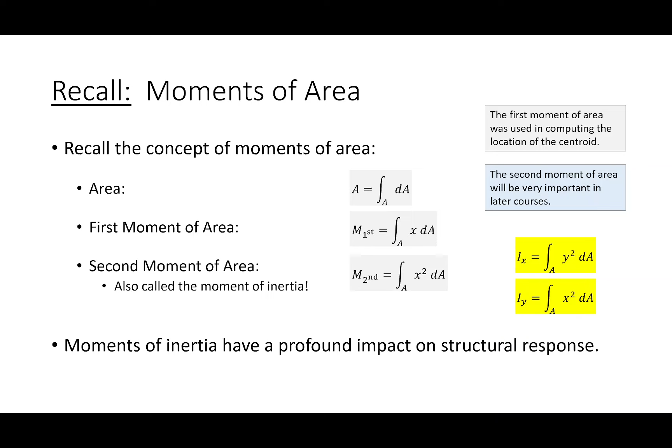So just a little background. We've talked about area and then moments of area. If we wanted to calculate area, we would integrate dA. If we wanted to calculate the 7th moment of area, it would be the integral of x to the 7th times dA. In engineering, the first and second moments of area are the only ones that are really useful. The first moment of area is critical to locating the centroid, and the second moment of area is called the moment of inertia.

We talked a little bit about how they have a profound impact on structural response. Here's my little surface pen—you can see it's got a rectangular cross section. It's stiffer this way than if I were to bend it this way. Imagine if any of you have a ruler in your hand: it's flimsy one way, really wavy and flimsy, but if you take it 90 degrees and try to bend it about the sharp side, it would be very rigid, very hard to do that. That's because it has a higher moment of inertia about this axis.

Now what we typically are interested in when calculating a moment of inertia is: if we have a given cross section, what we're interested in is a moment of inertia that references a particular coordinate system. So we want the moment of inertia about this origin. And where do you think that point is? The centroid. That's what we're interested in.

So let's deal with a really simple shape. Let's say I had a rectangle, and I wanted to find the moment of inertia about, let's say, the x-axis. So this is the x-axis, this is the y-axis. The moment of inertia about the x-axis would be the integral of y squared dA. So let's talk about that.

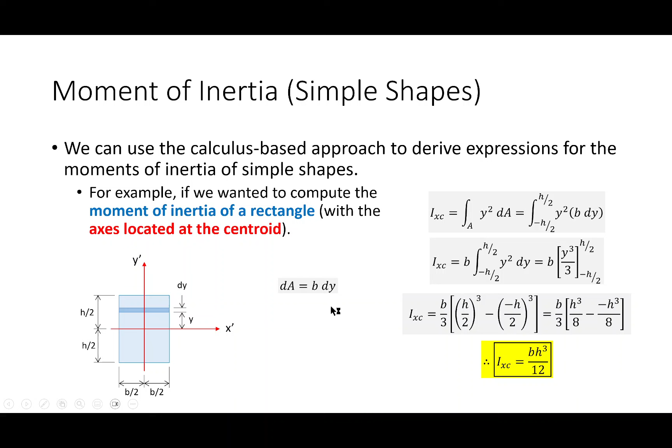Does that make sense? Okay, now what I'm interested in, by the way, is not how to compute the moment of inertia of a rectangle. I'm interested in how to compute the moment of inertia of something like this, right? Something that is much more arbitrary and much more complicated.

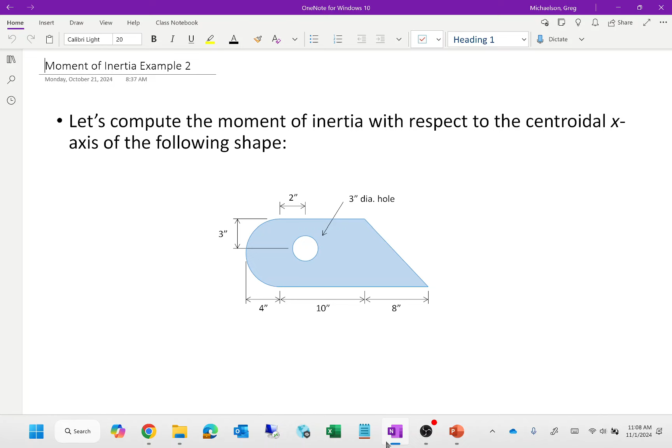And the point I'm making is, if I wanted to compute the centroid of something like this, how would I do it? I would break it up into simple shapes, right? To determine properties of each one of those shapes, and then there's an algorithm, right? I propose that the same thing is true for the moment of inertia, okay? So we're going to do the same thing.

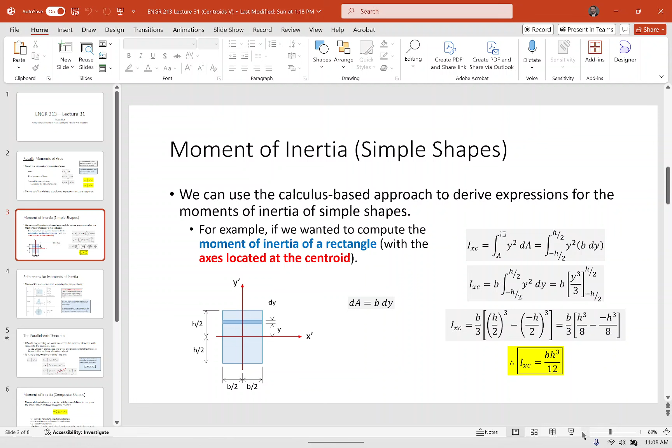So I have here the moment of inertia of a rectangle. If you open up your textbook it will list moments of inertia of various simple shapes. And I've put some of those here on the board because I noticed that the textbook is either really heavy or really digital, and you may or may not have it with you, so I figured let's just go ahead and have it here for reference. But every one of these are within your textbook that you can very easily find.

One of the things I'll mention is you might want to pay attention to the notation. So, for example, let's take a look at the triangle. The triangle is kind of easy. So the triangle actually does do this. So look here, I've got a triangle that's B wide and H tall, okay?

Now, it lists two moments of inertia. It lists an IX and then this sort of IX bar, this IX prime. That's sort of the one that we're going to use because that's referencing the centroid. The other one references the bottom, which does have applications, but for the purposes of what we're doing here, we're just interested in the centroidal moments of inertia. So like for the rectangle, just use the one with the bar, so on and so forth. Okay, make sense?

And just so everybody is aware, we are not going to use it, but if you're wondering what they are: we have the moment of inertia about the x-axis, which is the integral of y squared dA. We have the moment of inertia about the y-axis, which is the integral of x squared dA, something like this. So what if you have the integral of xy dA? I think the textbook calls that J. It's a polar moment of inertia or a mixed product of inertia.

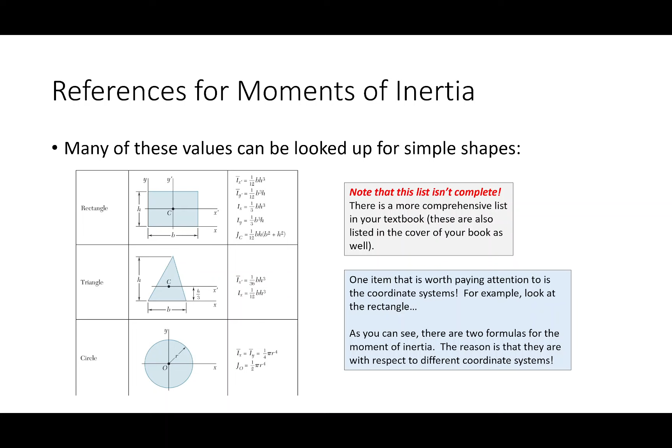So if you see these J terms, I think some textbooks refer to that differently, but I think that's what it's calling it here. Sometimes they just call it IXY, sometimes they call it J, but we're not using those. So, okay, so far so good?

Okay. Now, like I said, the analogy with centroids is: what we did with a centroid is we took a complex shape, broke it up into simple shapes, determined properties for each one of those shapes, plugged it into an algorithm, right? So the way a moment of inertia is going to work is the same idea. We're going to break it up into simple shapes, determine properties of each of those individual shapes, and then plug it into an algorithm, okay? The name of that algorithm is going to be the parallel axis theorem, okay? And I want to take some time and explain how this works, okay?

Like I said, we are interested in locating moments of inertia with respect to the centroid, okay? So let me sort of give you the motivation maybe here on the screen. I'll do the motivation here on the screen, okay? So let's come up with a simple shape.

Let's take a plate with a hole in it, okay? Where is the centroid of that hole? I don't know, like right there? Okay, where is the centroid of the whole plate? The plate with the hole in it? I don't know, maybe like right there? Does that sound about right?

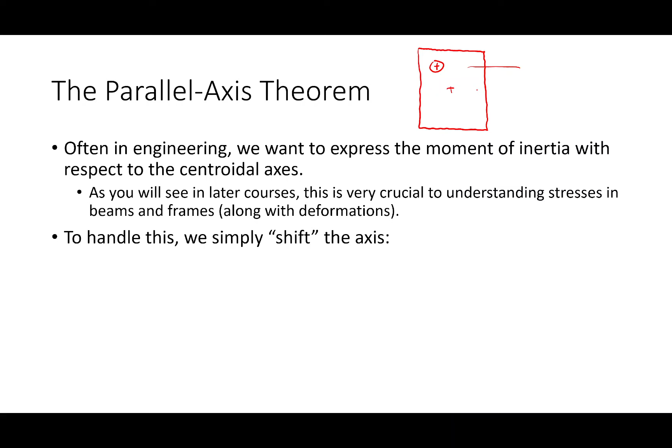Now the trick that we use is this. So if I have the moment of inertia as the integral of y squared dA, if I want to reference this with respect to a common axis, what I'm going to do is shift it. And the way I'm going to shift it is I'm going to say y plus some shift, and then the shift is going to be however far the distance is from here to here. That's my little shift that I do.

All right, so how does this work? Here's going to be my moment of inertia, and here's going to be my new moment of inertia. I'm going to shift it. Let's break out the algebra. What do I do with this? How do I expand this? Break out a little bit of that aluminum foil, right? And so we do first, outside, inside, last.

So then I got a bunch of terms. I'm going to take those terms, do what I can do with integrals. The integral of the sum is the sum of the integrals. Factor out my constants, maybe turn it into something like that. So I got 3 different integrals.

So I have the integral of y squared dA, that's my original moment of inertia. I've got this one over here. This integral over here is the integral of dA, which is just the area times d squared. So this is what I'll call A D squared. And then I've got this.

This references the centroid. But the whole point of this exercise was to determine the moment of inertia with respect to there. So what are the coordinates of the centroid if I place the axis right here? 0, 0, right? So what I'm saying is this whole integral goes to 0. Does that make sense?

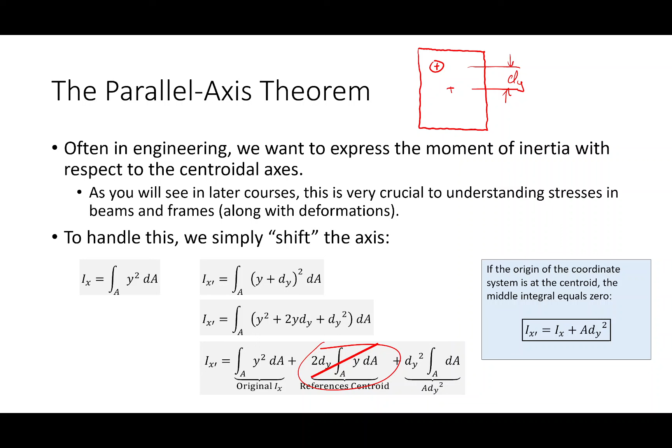So the algorithm for the moment of inertia is this. If I want to find the moment of inertia of a composite shape, what I do is I take the moment of inertia of each individual shape and I add A D squared. Area of each shape, and then D.

You would think that the tricky part is how to compute D, but that's actually really easy because all I do is take the distance for each individual shape minus the centroid for the whole thing. This is actually the easiest part. It seems challenging, but it's really easy.

And one of the other things that's kind of interesting is, does it really matter which direction I do the subtraction? Like, could I do y bar minus yi? Does it really matter? Why does it not matter? Because I'm squaring it. Whether I do this minus this or this minus this, I'm getting a number and then I'm squaring that number. It's going to come out positive. It's not going to matter.

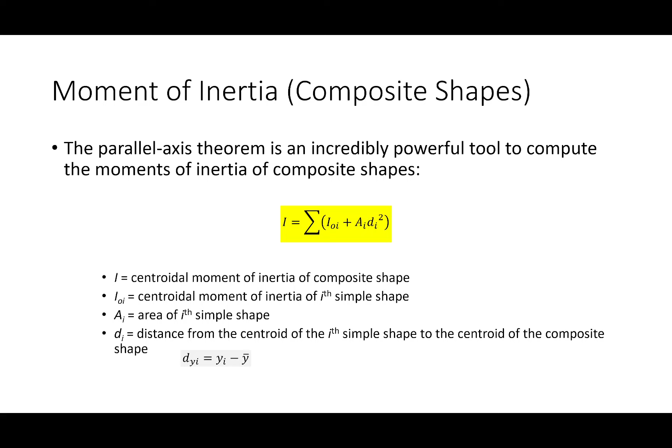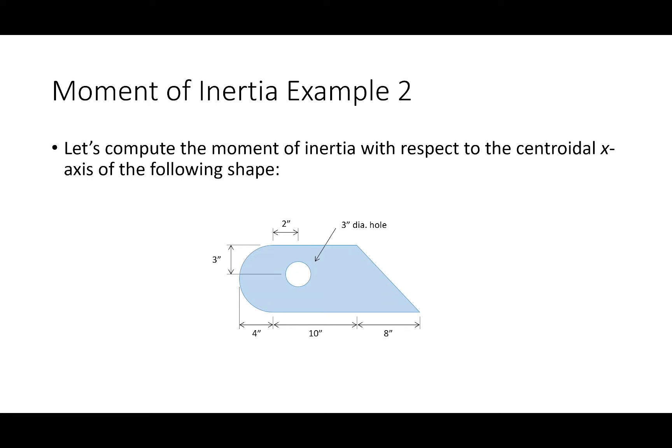So now I have an algorithm for computing the moment of inertia for an arbitrary shape by splitting it up into a series of simple shapes. So in order to exercise that, let's look at the following problem. I'll show you how this works. And by the way, this is another one of those methods that's very Excel friendly.

So we're going to compute the moment of inertia with respect to the centroidal x-axis of the following shape. So here's sort of, if you want a physical understanding of what we're doing here. Oh God, please forgive my horrible 3D art skills.

So let's say I had a beam that was made of this, that was extruded in 3 dimensions. And let's say that I decided to stand on top of this beam. What we are computing is a moment of inertia that would express how stiff it is this way. So the moment of inertia about the centroidal x-axis would tell me how stiff it is this way.

So if I wanted, what I could do is I could repeat, after we do this problem, I could literally repeat the entire exercise by taking this and turning it 90 degrees and doing it again. And it would tell me which is the stronger direction. And by the way, which do you think is the stronger direction? This way or turning it? See, I would argue the other way because I think it's longer this way.

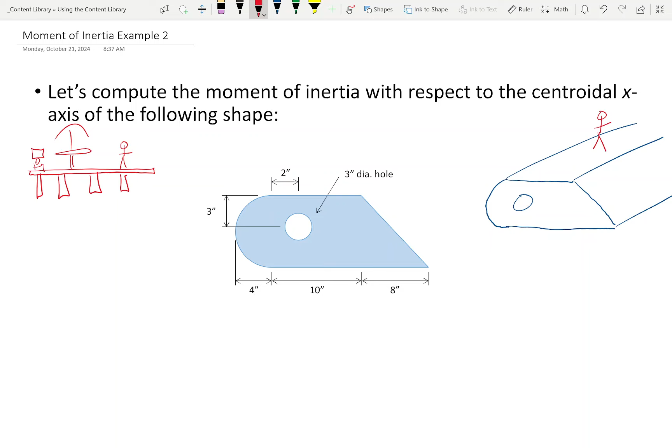Okay, so here's what I'm going to do. I'm going to split this up into what I think is a pretty easy to figure out series of simple shapes. And what we'll do is we'll number them.

So we'll call the rectangle, we'll deal with the rectangle first. We'll deal with the triangle second. We'll deal with the semicircle third. And the circular hole fourth.

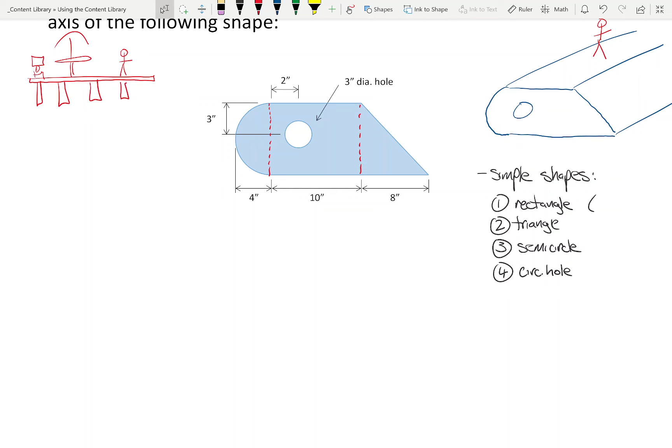And by the way, each one of these shapes is going to have positive contributions except the last one because it's a hole. Does that make sense? Everybody, so far so good?

Now, the goal is to compute the moment of inertia with respect to the shape's centroid, right? But in order to do that, we first need to figure out where the centroid is. We don't even know where the centroid is for this location. So we are going to need to pick a reference coordinate system right off the bat.

So what I'm going to do is this. I'm going to say that's my reference coordinate system, so that when I start computing things, I'll have something to go off of.

Okay, do we have enough information here to do this? We don't have the overall height or the radius of that semicircle or diameter. Well, did I not give that? Did I not copy? You gave the diameter. Oh yeah.

Let's talk about that actually. So this is 4, right? I'm glad you brought that up. That was actually my next note.

Did you get a sneak look at this before? Yeah, you're right, this dimension doesn't look like it was explicitly given. But let's look at the semicircle - if the radius of the semicircle is 4, what is the diameter of the semicircle? 8. And so that makes this height 8 inches.

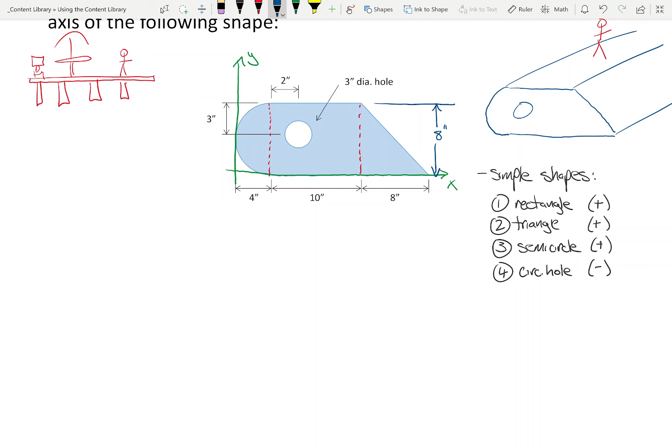Remember in Engineering 102 when I said only place a minimum number of dimensions necessary, because the more you place, it all comes full circle. All right, okay, so let's move on.

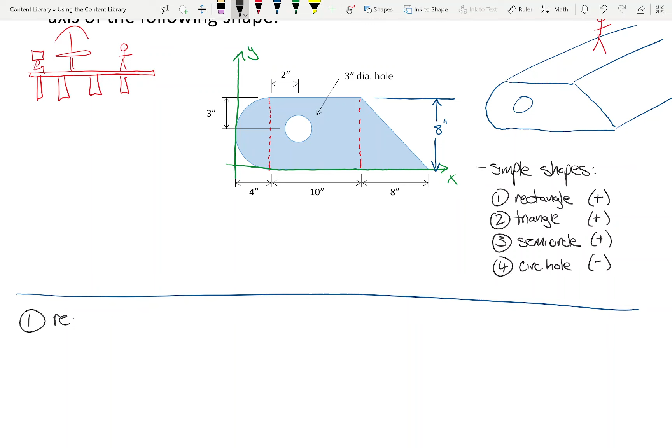Okay, let's start computing some properties. Let's start off with the rectangle. For the rectangle, the first thing - for this algorithm, for this computation of the moment of inertia, we're going to need 3 properties. And let me do some notation here - let me do A sub 1.

So we're going to need 3 properties. The first thing we're going to need is the area of the rectangle. What is the area of the rectangle? 80, right? Because it's 10 times 8, which is 80 square inches.

Okay, the next thing that we're going to need - if we're computing a moment of inertia with respect to the centroidal x-axis, we're going to need y distances. So let's do a y1. Y1 is going to be how far is it from the origin to the centroid of that rectangle vertically. So how far is that? Is it 3 or is it 4?

Because the rectangle is 8 inches tall, right? So we're talking about just the rectangle. To get to the center of the rectangle, we're going 4 up, right?

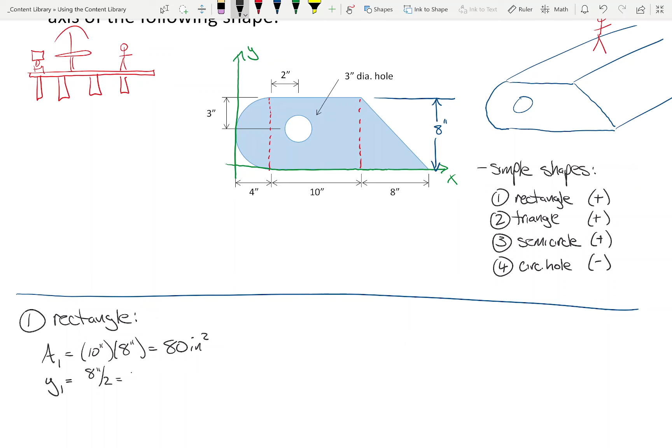Okay, now we are also going to need a moment of inertia with respect to the x-axis. Now, we derived that for a rectangle, and I have that listed up here. That is BH cubed over 12, where B is the horizontal distance and H is the vertical.

Okay, so this is our first time dealing with these formulas, and in these formulas, the order really matters. B is the horizontal, H is the vertical - the order really matters. Okay, so what are we getting for this? We'll say 2 decimal places.

Do I have a second? Because everybody brought their Casio FX115 ES Plus or similar scientific calculator on a Friday at 11 o'clock.

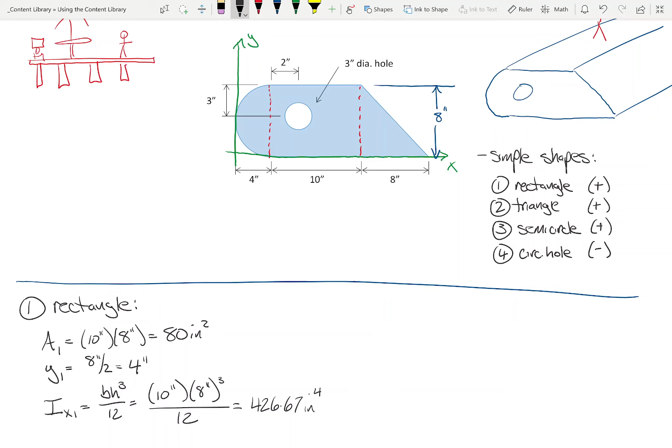Yes, okay, there we go. Is everybody good with that? Okay.

Let's look at this triangle. With the triangle, we're saying the width and the height. Let's see if we can figure a couple things out. First off, what is the area of the triangle going to be? What is the area of a triangle? 1/2 base times height.

8 over 2 is 4. 4 times 8 is 32.

Y sub 2—I didn't give you that one. Let's see if we can remember this. How far from the bottom, the green coordinate system, to the centroid of a triangle? Everybody's saying, I can see it, h over 3, right? We go a third up for a triangle. So 8 over 3, that's going to be like 2.67—a little more than 2, a little less than 3.

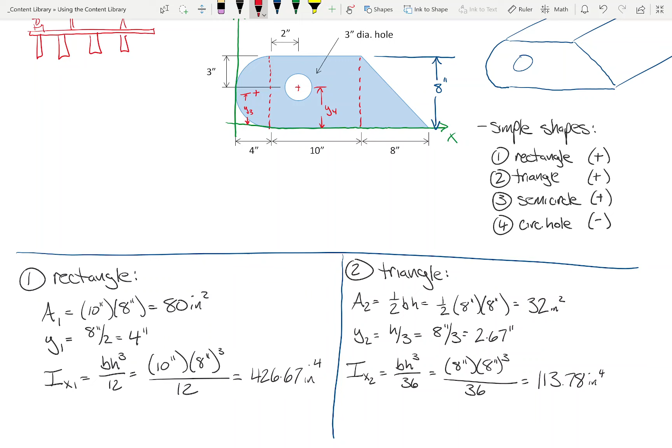Okay, so now that I've written that down, let's do 3 and 4. So 3 is the semicircle, and what I'll say for that is the radius is 4.

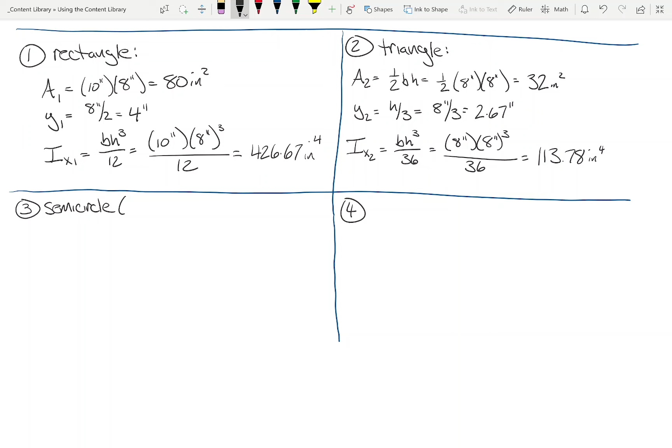So that means the area is pi r squared—oh no, it's not, is it 1/2 pi r squared. So what do we got? We got 4 squared, 16 over 2, 8. So 8 pi. Pi is 3.14, so it's about 24, 25 or something like that—25.13, there we go.

Alright, y in this case is going to be 4 inches. And IX3, again, pi r to the fourth over 8.

Okay, so 16 times 16 over 8. So let's see, that's 16 pi—or wait, no, I don't know. 100.53? Yep. 32 pi, that's what it is.

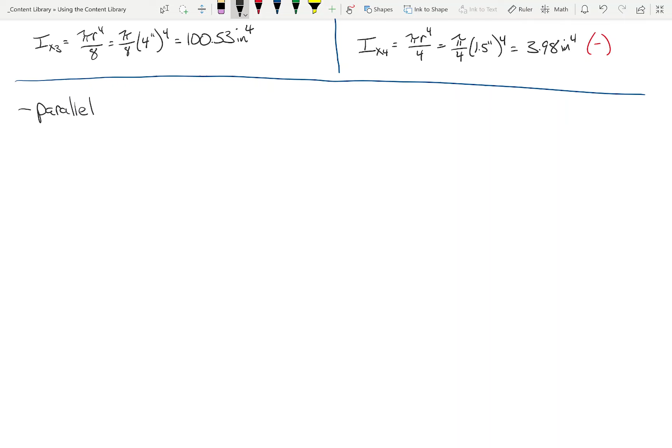Okay, now in order to compute the moment of inertia, we're going to need 2 formulas. First thing we're going to need is that, because we are going to locate the centroid. We're going to need that. The second thing that we're going to need is what I'm going to call this.

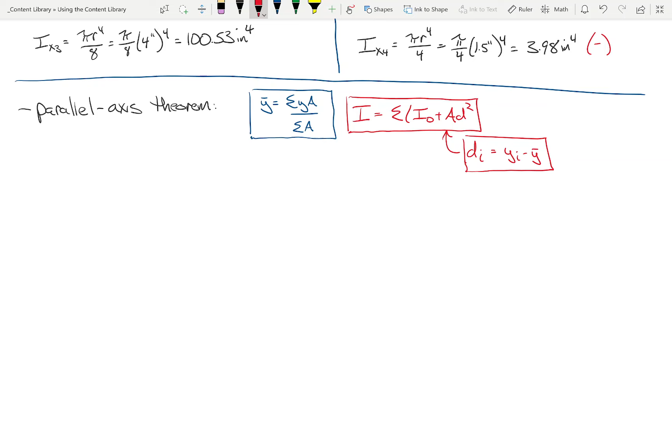And I'm going to go ahead and write this down because I threw that there on the slide, and I just wanted to have that there for reference.

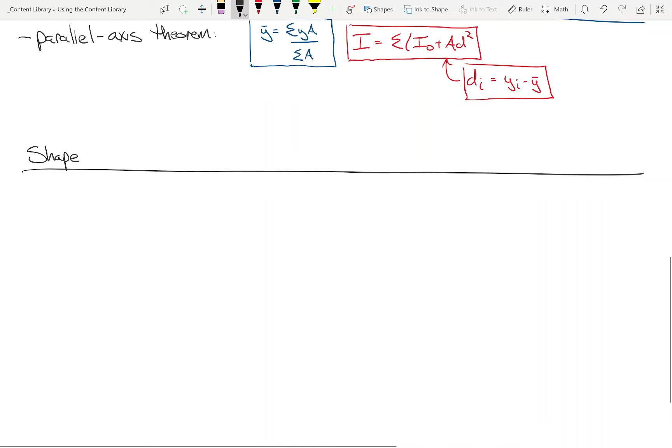So, how many shapes do we have? 4? Okay.

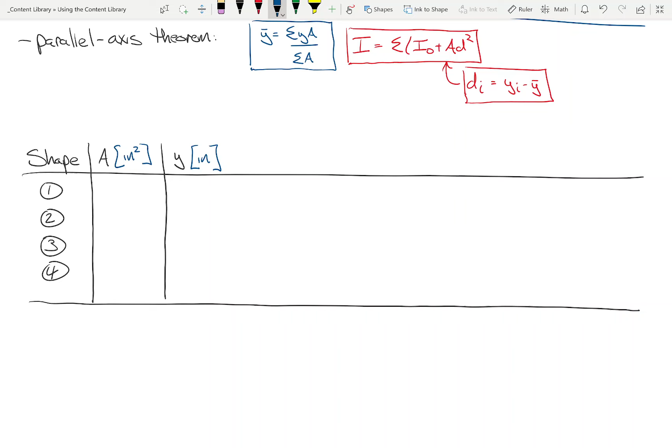The first 3 columns past this are going to be very familiar because we're going to be locating the centroid just as we have this whole time. So we're going to have an area column in square inches. We're going to have this column, and we're going to have that right here. Nothing here should really be that different, okay?

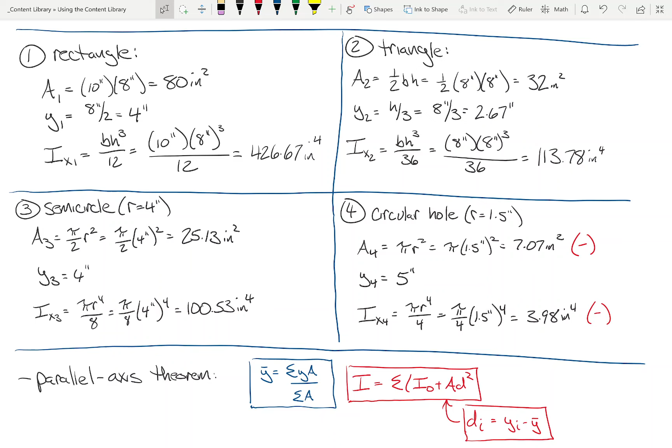So now what I'm going to do is list the properties that we've already computed. If you scroll up, we'd already done A1, A2, A3, A4, Y1, Y2, Y3, Y4. So I'm just going to list the properties that we've already computed. So this is 80, 32, 25.13, and negative 7.07. Drop that down a little bit.

And then we had done the Y's. We got that this was 4, this was 2.67, this was 4, and this was 5. Notice how we're being cognizant of our signs, right? All the Y values were positive because they were all going from the bottom of the shape measured up. All the areas are positive except the area for the circle - that's negative, it's not contributing stiffness.

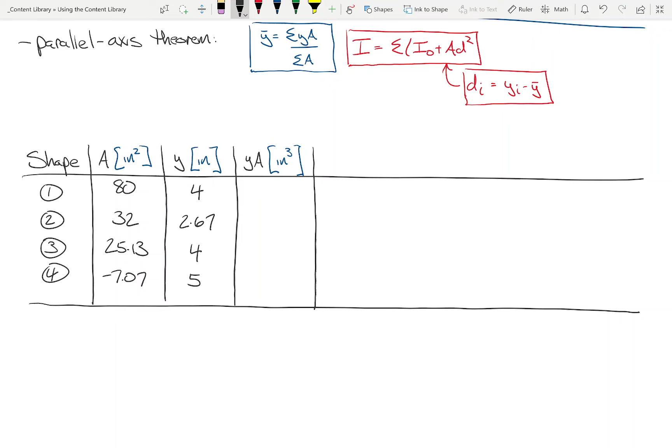So now what we're going to do is 80 times 4, and if it's okay, I'm going to do this part for you. 320. This is 85.33. This is 100.53. Negative 35.34. Okay, is it okay that I'm going this fast on this? We've done this before, right?

So what would I do then to locate the centroid? I would sum this column, and then take the quotient - divide those two, and I would get y bar. So let's go ahead and do that. This is... so let's put a sum right here. This is 130.06.

And this is 470.52. So right down here, I'm going to say y bar is 470.52 inches cubed over 130.06 inches squared. And when you divide that out, you get 3.618.

Is everybody okay with that? Okay. All right.

So the next column that I'm going to declare is IX0. I'm calling it that because these are the moments of inertia of each shape, but referenced with respect to their individual centroids, not the centroid of the whole thing. So I'm going to list the values as we computed them.

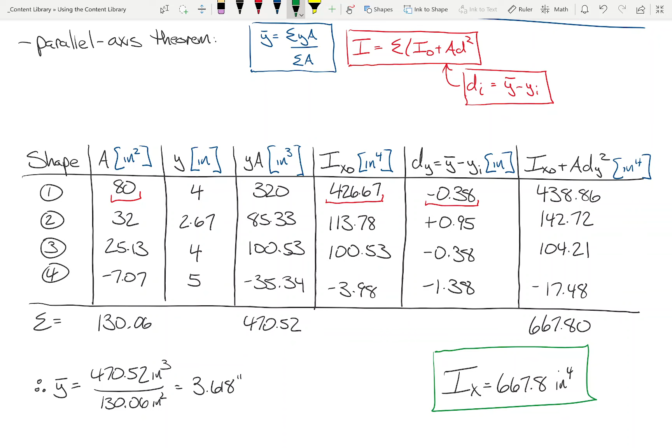So if I sum this column up, I'm going to get 667.8. So if you want an answer, we get that.

I'm curious, can a moment of inertia be negative? Ever? No, it can't. Everybody's like, maybe, stop. I imagine many of you don't get that reference - look it up, a game show called Press Your Luck.

All right, okay, now listen. A moment of inertia is a reflection of stiffness. So any area, any shape with some defined area is going to have a moment of inertia. Let me ask it this way: could you have a shape with a negative area? I mean, you could have a hole, but just a shape by itself, you can't, it doesn't make sense, you know? Like this hole could be negative, but not for the whole shape. Okay, is everybody good?